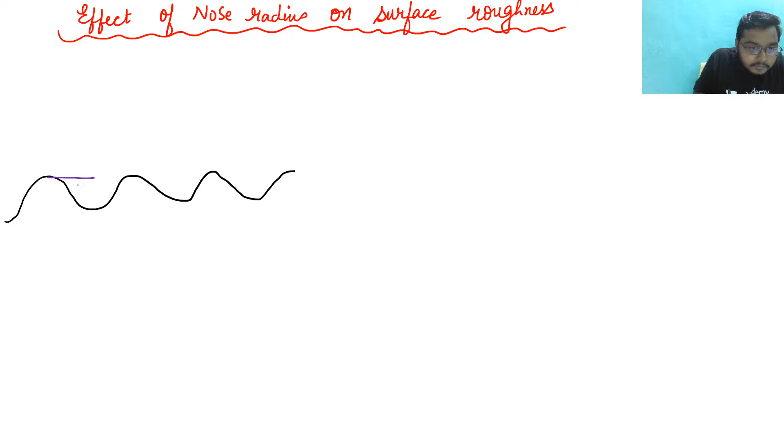So see, these are your peaks and valleys. When you machine a surface, you will get something like that. And this height, this height, is h max. So h max is given by f square by 8r.

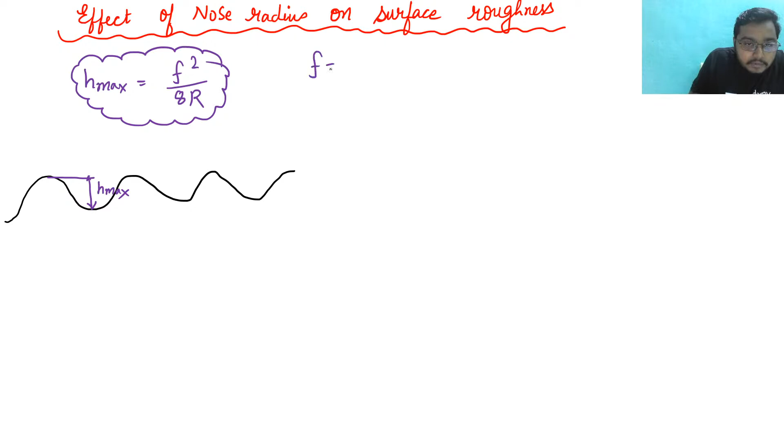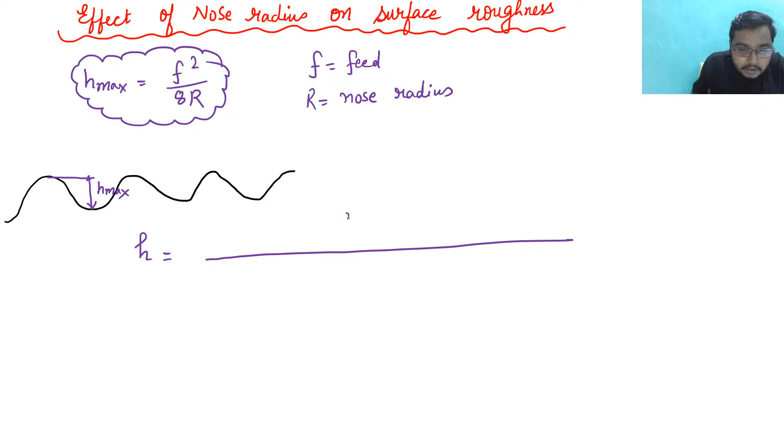Okay, where f is feed rate, r is nose radius. Next point is this h max, which is also defined as f divided by tan of cs plus cot of ce. This is another equation.

Clear? Now, cs is side cutting edge angle, and ce is end cutting edge angle.

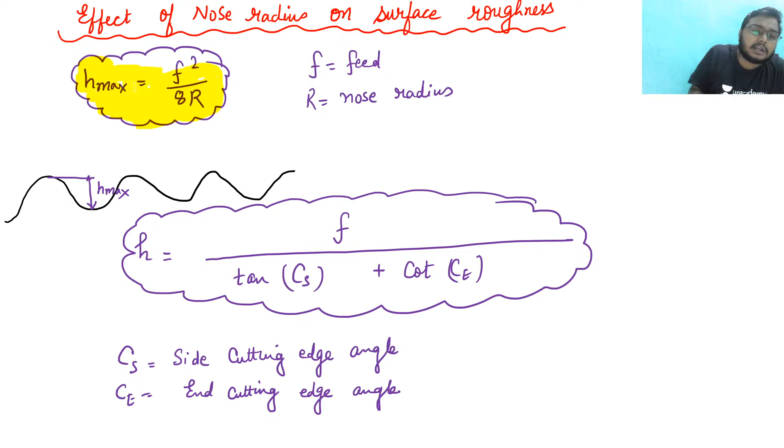So these are the two important equations from the nose radius point of view, and the relation between surface roughness and nose radius. Just remember these two equations. I have already explained the behavior when nose radius is increased, and how surface roughness looks like when it is sharp. Only this formula had been overlooked. Kindly note this formula, it is very important. Take a screenshot and note it down, and I will explain one question related to this.

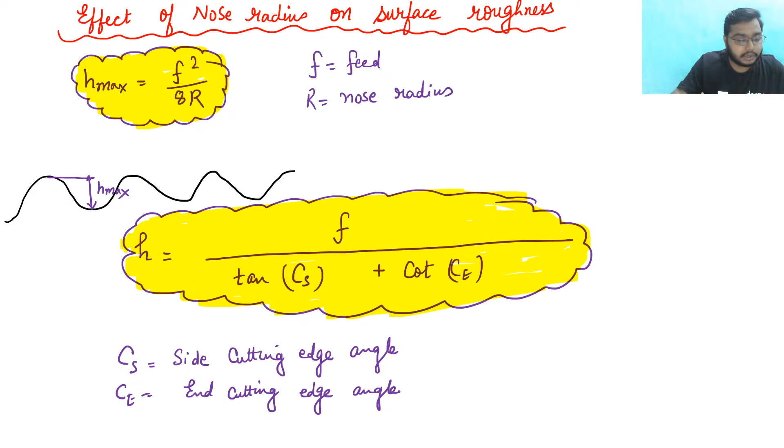So now see, there is one question. I hope you have noted down everything. This question is of GATE 2005.

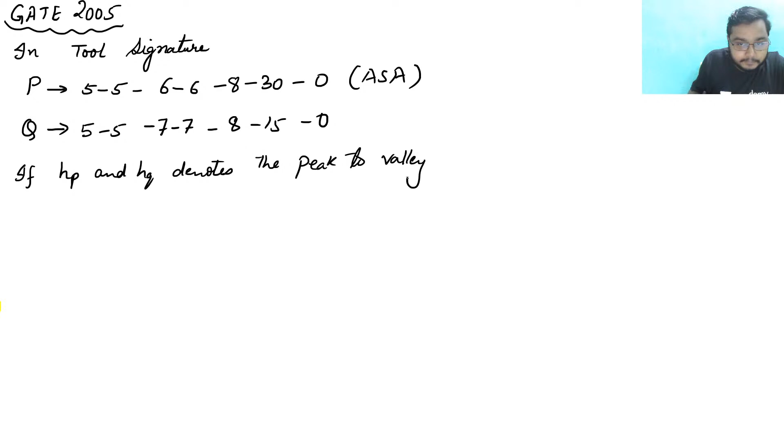The question is that in tool signature, for P it is 5 5 6 6 8 30 0, this is in ASA system. And for another, Q, it is 5 5 7 7 8 15 0, this is also in ASA system. If HP and HQ denote the peak to valley height, then we need the ratio of HP by HQ.

So you just need to find this. I have just told you the expression for this height. Try to solve it. Yes, good evening Nishant, please try to solve this.

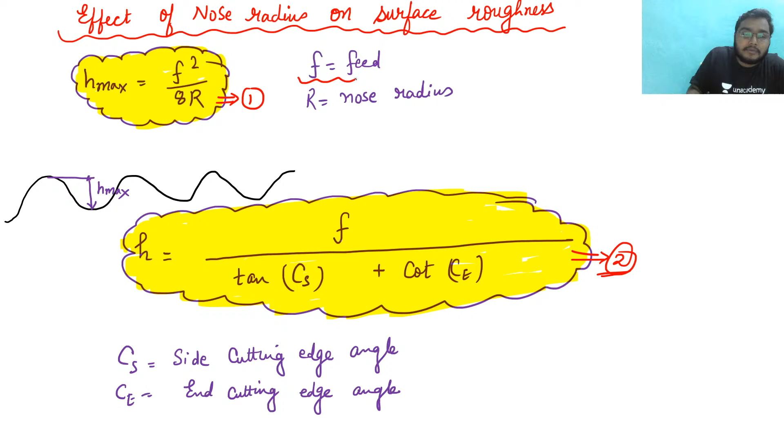We have introduced one new concept, the relation between nose radius and surface roughness. This is the one relation that you should remember, and this is another relation between feed, nose radius, side cutting edge angle, and end cutting edge angle. Please try to solve this question.

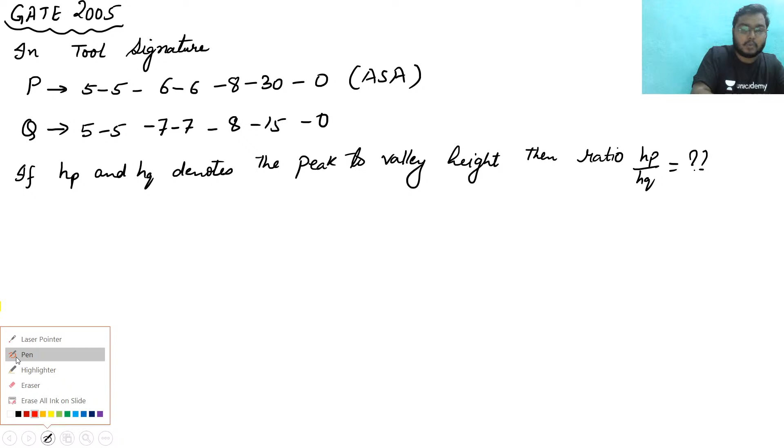Please tell me the answer. This is a basic question. If you could remember... okay, Asis has given 0.56. Let me check it, Asis. No, no, Asis, kindly check your answer once again, it is not 0.56. Please check your answer.

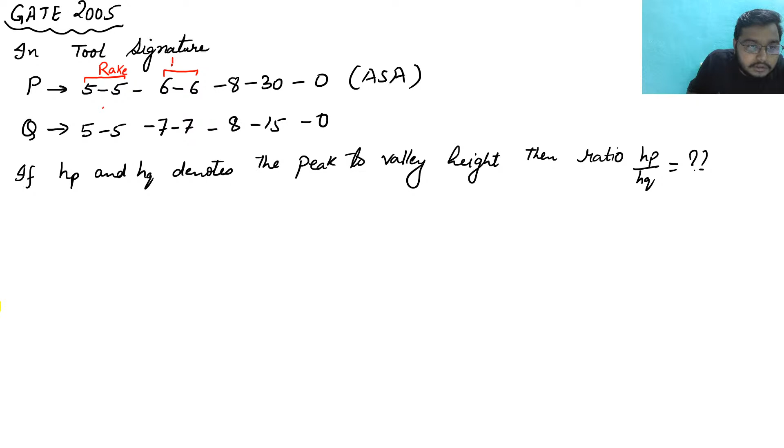See, what I told you when giving the nomenclature, how it looks like. This would be your rake, this would be your clearance, that is relief angle, rake. This is your relief, and this is your cutting edge. I have already explained this concept.

How are you people getting these weird answers? Yes Asis, now it's correct. See, cutting edge is what, this is the cutting edge, right? Now, I have already told you how to remember this: rake, this is alpha B, this is alpha S, this is gamma E, this is gamma S, this is end cutting edge angle, and this is side cutting edge angle.

Remember it as ESE, engineering services examinations, right? In this way I have already told you how to remember those things. If you have any problem, please check that video, feel free to check it. So this is the CE for tool P and CS for tool P.

So if I write HP, HP would be F by tan CE plus cot CS. Now what is CE for P? Sorry, that is tan CS unit. So this is going to be CS, this is going to be CE. Now what is CS for P? CS for P is 30. So tan of 30 plus cot of 8. This is for HP, let it be equation 1.

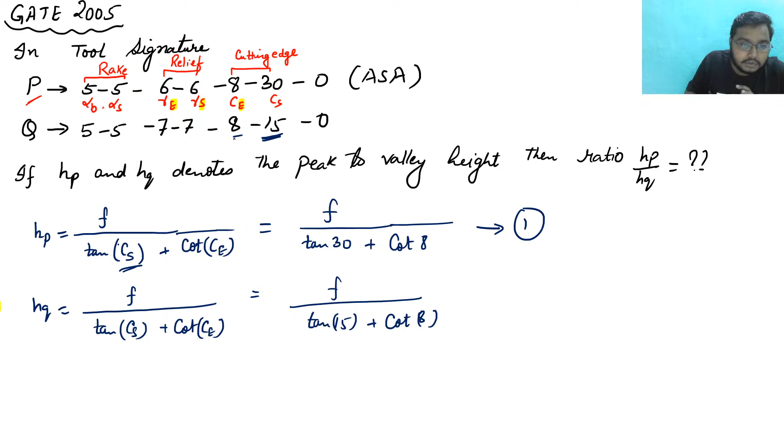For HQ, what should be the relation? F by tan of CS plus cot of CE. CS would be... so tan of 15 plus cot of 8, because this is going to be CE. Let this be equation 2. So HP by HQ is equal to F by tan of 30 plus cot of 8, into tan of 15 plus cot of 8, divided by F. The relation comes to be HP by HQ equals tan of 15 plus cot of 8, divided by tan of 30 plus cot of 8. Clear?

Clear? And if you would calculate this, then you would get the relation as...

0.9597. Okay, clear? So is this concept clear to you? Is this concept clear to you? Fine.

So there is only one thing. You have to remember the effect of nose radius on surface roughness, how it is denoted in terms of angles, that is in terms of side cutting edge angle, in terms of end cutting edge angle, and in terms of feed and nose. So I hope you have understood these things. Okay.

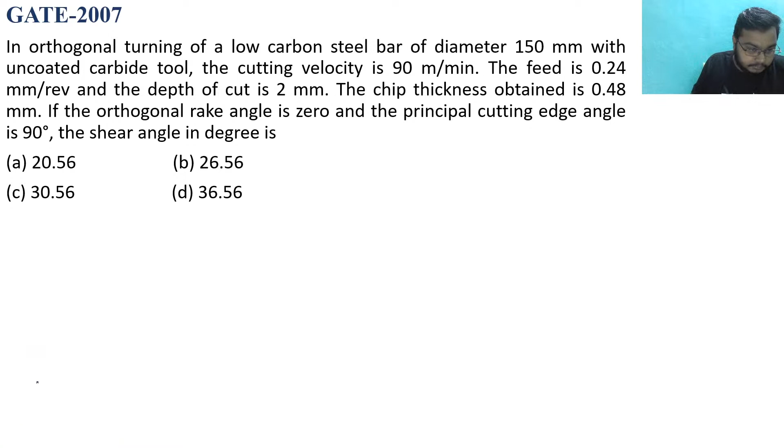in this question it is mentioned: orthogonal turning of low carbon steel. So whenever there is orthogonal machining, it simply means that lambda is going to be equal to 90. Clear?

Now, of a low carbon steel bar whose diameter is given as 150 mm with uncoated carbide tool, cutting velocity is given as 90 meter per minute. Feed is given as 0.24. Depth of cut is given as 2 mm. The chip thickness obtained is 0.48. The orthogonal rake angle is 0 - this is the most important thing. Orthogonal rake angle is 0 and principal cutting edge angle is 90 degrees, so this is 90 degree I have written.

So they have told us to find the shear angle. Okay, yes, B answer is there. So basic question is there: alpha is given as 0, lambda is equal to 90 degree, and since it is orthogonal machining, so I have told you

T is equal to F sine lambda. T is equal to F sine lambda. So if T is equal to F sine lambda, then T is going to be equal to F, which is 0.24. So this is your uncut chip thickness. Now chip thickness is what? Chip thickness is 0.48.

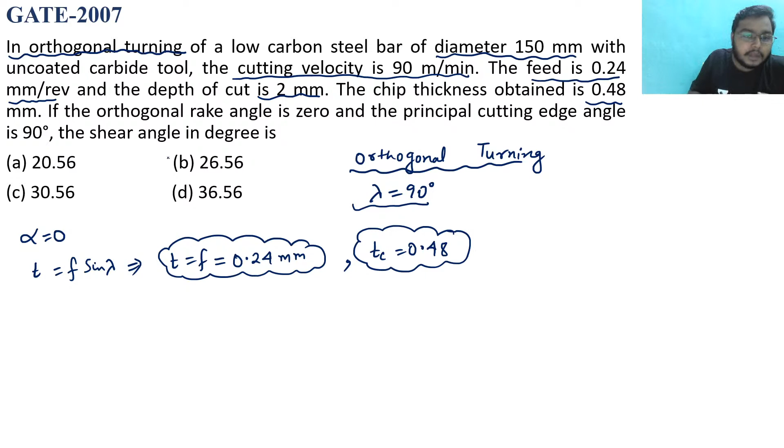Clear? So uncut chip thickness is given, chip thickness is given, orthogonal rake angle is 0. Then you have to find shear angle. So what you will do? Tan phi is equal to r cos alpha by 1 minus r sine alpha. Fine. How you can find the r?

R is going to be equal to T by Tc. What is T? T is 0.24 and Tc is 0.48. Okay, so this is R. Plug in the values. Now tell me the answer.

Okay, so answer is, this is going to be 0.5, and when you plug in these things, R cos of 0 by 1 minus R sine of 0, which will be left as only R, because cos 0 is 1 and R sine 0 is 0. So you will be left with phi is nothing but tan inverse of R, which is tan inverse of... So phi would be 26.56565. This is what we have got. Okay, and answer is going to be B.

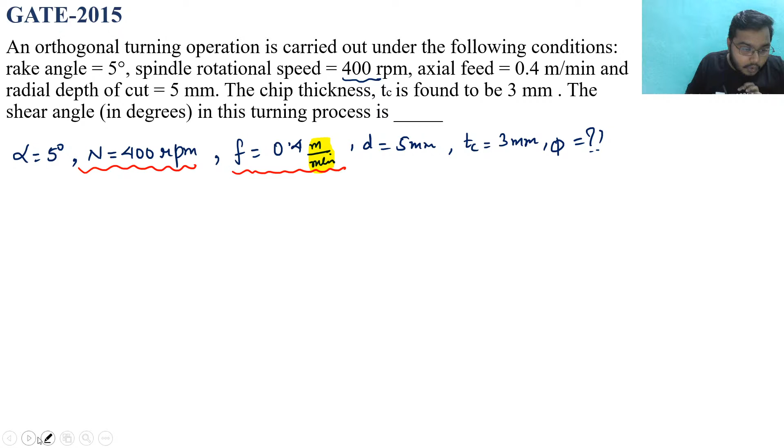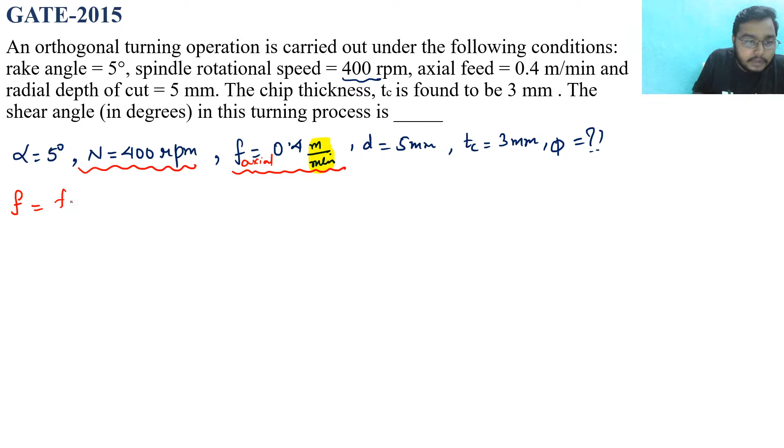So the first thing you have to do is to find the feed. How can you find it? This is the axial feed, F axial divided by N. When you do this, it is 0.4 meter per minute by 400 revolution per minute, and the minute gets cancelled, hence you are left with 0.4 by 400 into 1000. If you do this, you will get it in per revolution.

If you calculate these things, you will get only 1 mm. So from here, feed is 1 mm per revolution. Clear? Is this thing clear to you?

Even if the question was a routine question to find the shear angle, there is a twist here. So always read the questions very cautiously, because you might get a twist in your questions, just like a twist we see in a movie, right? So this feed is 1 mm per revolution.

Now since it is orthogonal turning, you can say T is equal to F is equal to 1. So this is the uncut chip thickness. Now what about the chip thickness? TC is 3 mm.

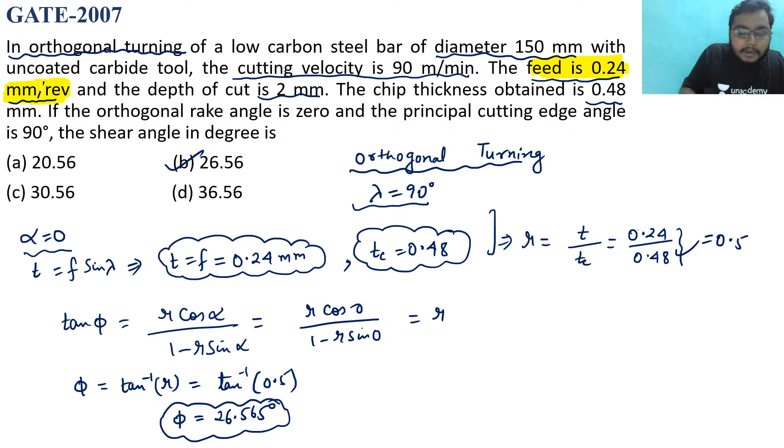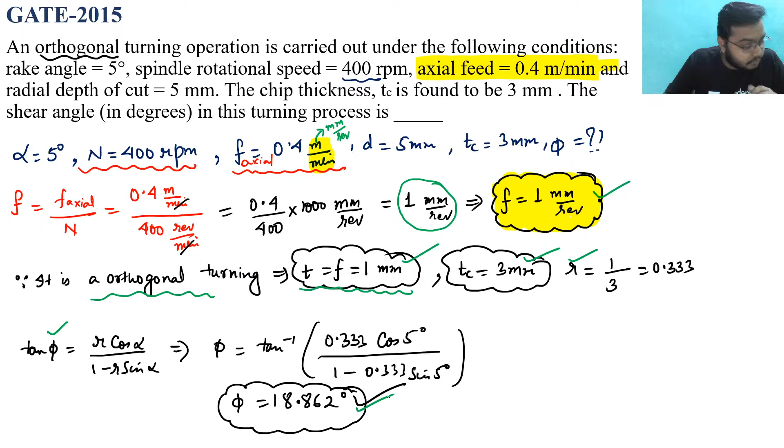Okay, thank you, no problem. Now try to solve this question, this is another question, GATE 2015. Try to solve this question. Same routine question is there, but just a little bit of twist is there, so your eyes and ears should be open, brain should also be open while solving the question.

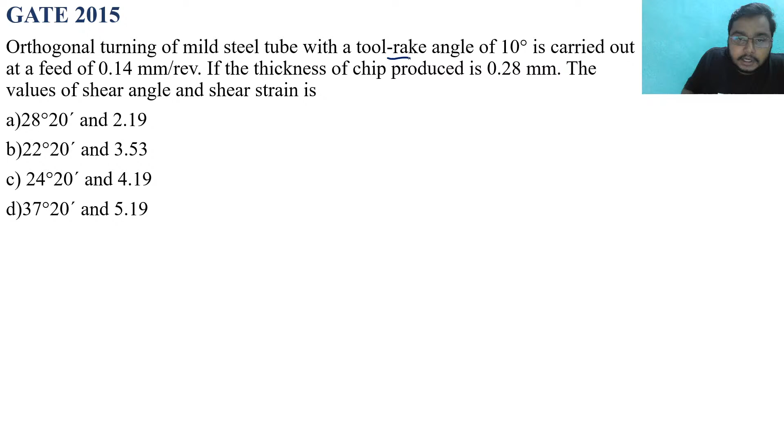Rake angle is given as 10 degrees. Feed is given as 0.14 mm per revolution, can you see it? 0.14 mm per revolution. So this is fine.

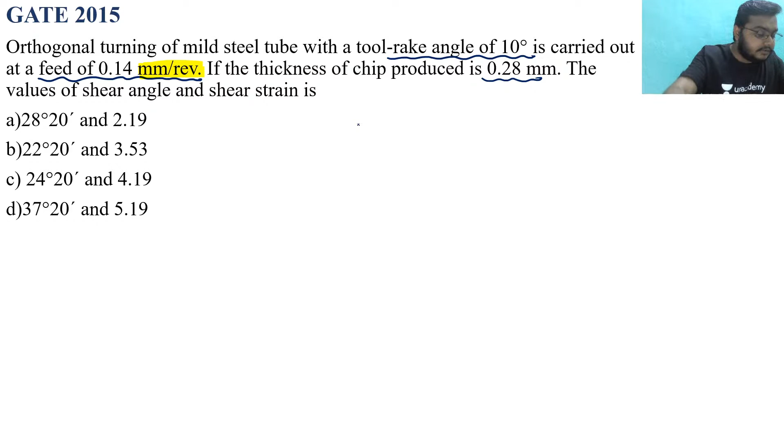If thickness of the chip produced is 0.28 mm, find the value of shear angle and the shear strain. Please try to find the value of shear angle and shear strain. Asis Shyam has given the option as A.

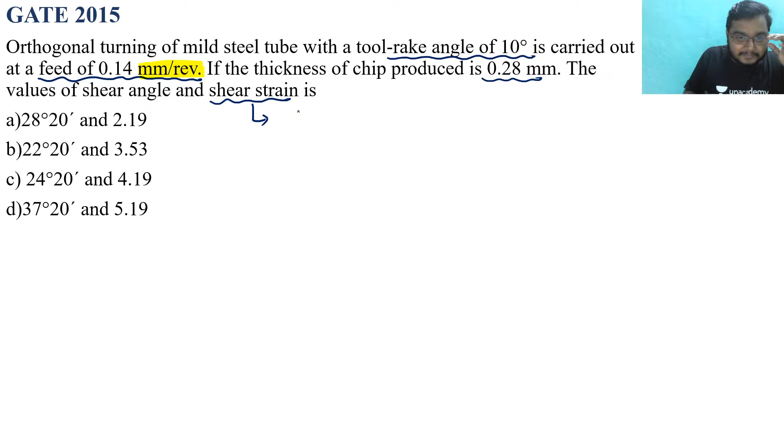Routine question is there, only one thing is there, shear strain. This is the shear strain, that is cot phi plus tan of phi minus alpha. So this is the value of shear strain, and how you can find it? You have to find phi, that is the shear angle, and shear angle will be tan of phi equal to r cos of alpha by 1 minus r sine of alpha.

Where r is this. This is the chip thickness, this is going to be your chip thickness, and feed is given as 0.14. So this will be your uncut chip thickness, right? So 0.14 by 0.28, this is going to be your r cos of alpha.

Alpha is 10. 1 minus of 0.14 by 0.28 sine 10, and when you solve this, you will get the value of phi. The value of phi that you get is 28 degrees.

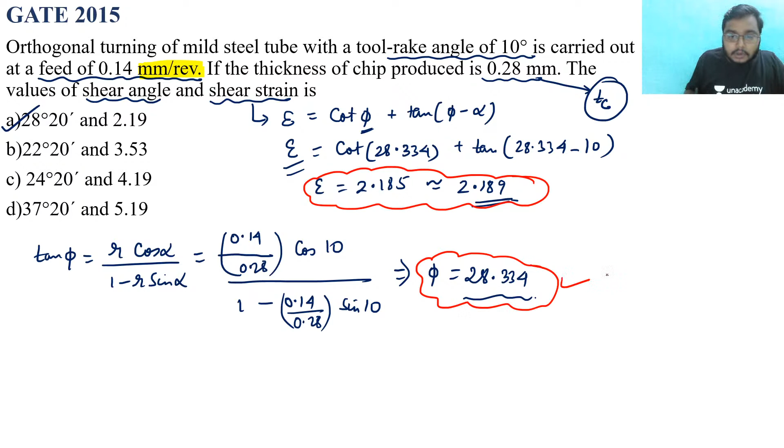I hope these things are clear to you. Now please try to solve this question, GATE 2016 problem is there. Please try to solve this question.

This session is going to be the end session of analysis of metal cutting, and from tomorrow onwards I will be teaching you tool wear, machinability, Taylor's tool life equations, and other miscellaneous things. After that your metal cutting is over.

But in this manufacturing you should practice a lot, and that is the reason why I am giving you so much of questions, because if you practice a lot of questions, then you can solve anything. Manufacturing really wants lots of practice from you. Please try to solve this question.

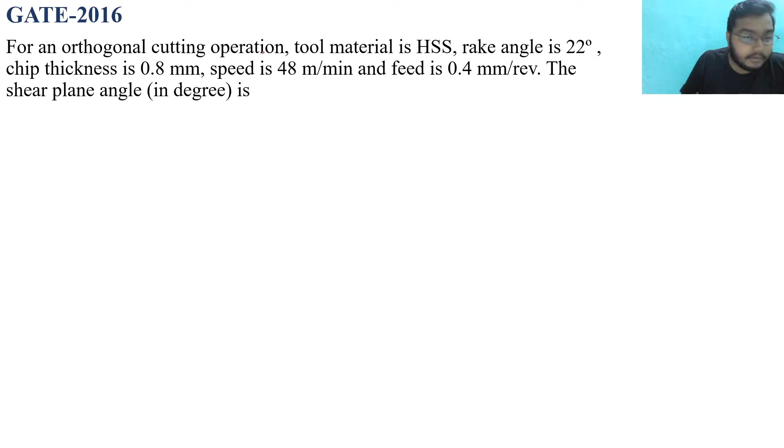Okay, so I have got a lot of answers: 29.7. This is an orthogonal cutting operation.

Tool material is high speed steel. Rake angle is 22 degrees.

Chip thickness is 0.8 mm, so chip thickness TC is equal to 0.8.

Speed is 48 meter per minute.

Feed is 0.4 mm per revolution, so F is going to be equal to 0.4 mm per revolution.

This is orthogonal machining shear angle. So F, this is the same thing, that is going to be T1, the uncut chip thickness. So T is equal to 0.4 mm.

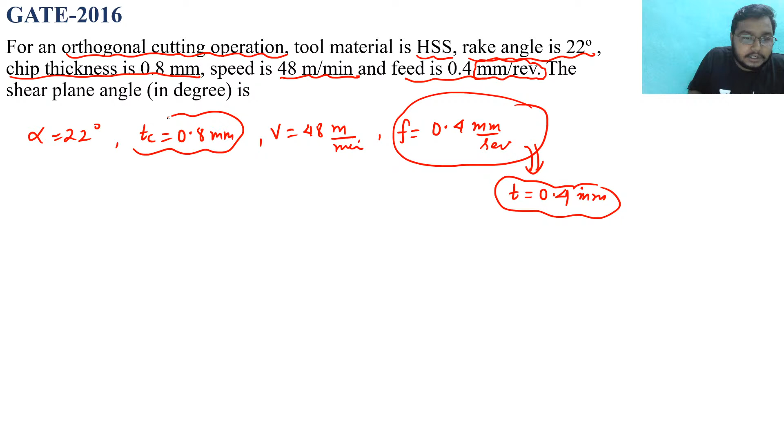You know the uncut chip thickness, you know the chip thickness, you can find R, and you know alpha. Just plug in these values in this equation: tan phi is equal to R cos alpha by 1 minus R sin alpha, and you will get the answer. The phi value that you will get is around 29.7 degrees.

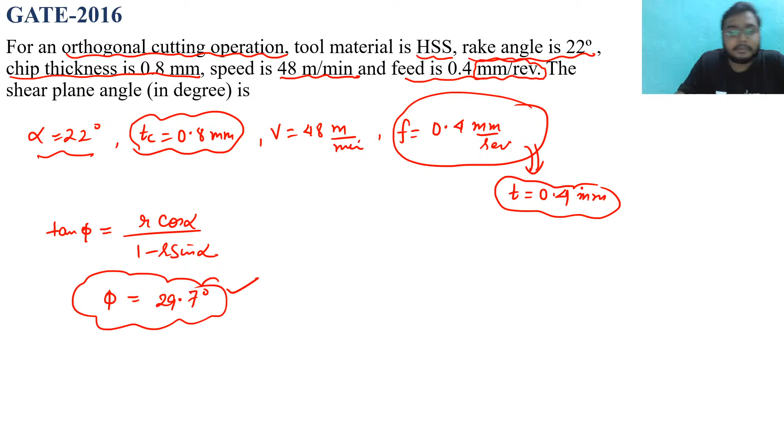Fine. These questions are very easy, so there is no need to repeat these things. These are just for your practice.

Now try to solve this question. Try to solve this question.

Please try to solve this question.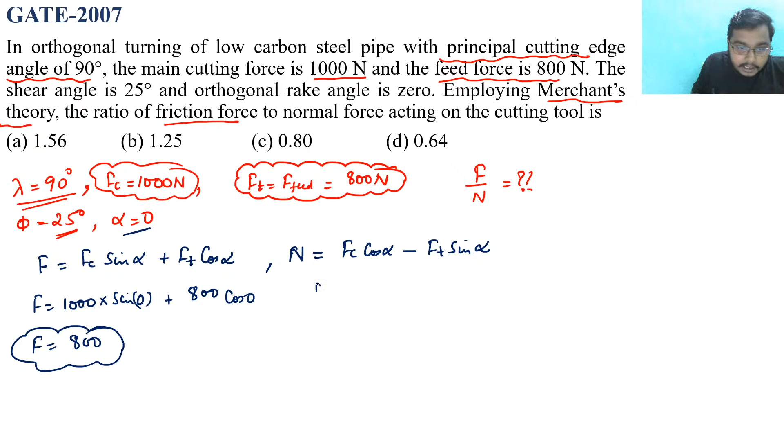And N is going to be equal to Fc, so N is going to be equal to 1000. So from here you got the value of F and the value of N. So F by N, that is mu, is equal to 800 by 1000. Clear? This is how you have got the value of 0.8.

I hope you have understood this problem. Yes, we can apply the special case here. See, whatever content I have given you, if you remember those things, you can solve the problem very easily. But there are multiple ways to solve a single question, so you should be aware of all the steps. Sometimes if you do not recognize the special case, you cannot solve the problem. So you just have to be very much accustomed with everything, so that you can solve this problem easily.

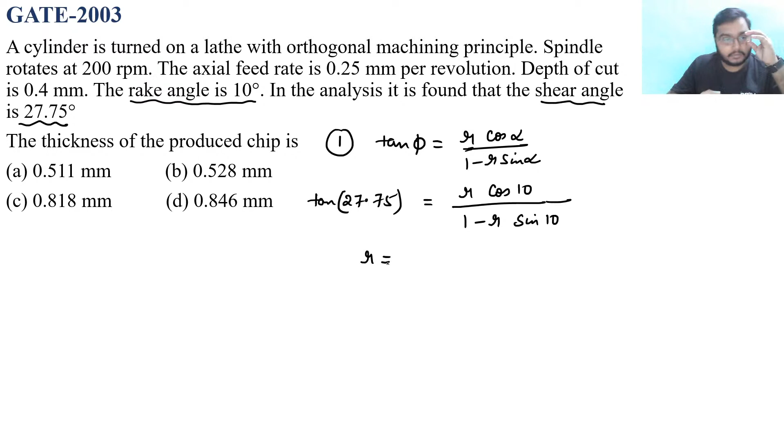Firstly you find the value of r. Tan phi, 27.75, is equal to r cos of alpha, that is 10, over 1 minus r sine of 10. From here find the value of r. Once you get the value of r, from that you can find the thickness of chip. I have given you a lot of hints, please try to solve this question.

What is the problem that you are facing? You are taking so much time, this is very unusual. You don't need to take this much time.

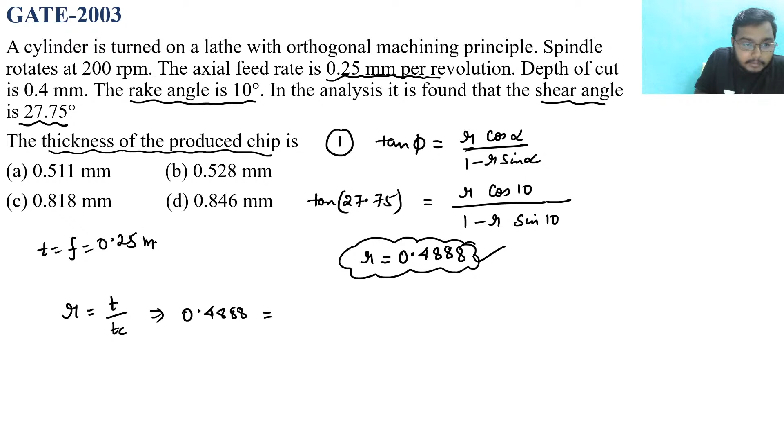Just see, from here you will get the value of r as 0.4888. This is the value of chip thickness ratio, and chip thickness ratio is nothing but t by tc. So 0.4888 equals T by Tc, and the value of axial feed rate is given as 0.25 mm per revolution. So from here T is equal to F is equal to 0.25 mm, because this is an orthogonal machining process. So this becomes 0.25 equals 0.4888 times Tc, and from here you get the value of Tc as 0.51138 mm. Clear?

Till now everything is clear to you or not? This is step 1: firstly you find tan phi, which is equal to r cos alpha by 1 minus r sin alpha. From here you find the value of r. Once you find the value of r, you use the equation r is equal to t by tc, and then you get the value of chip thickness.

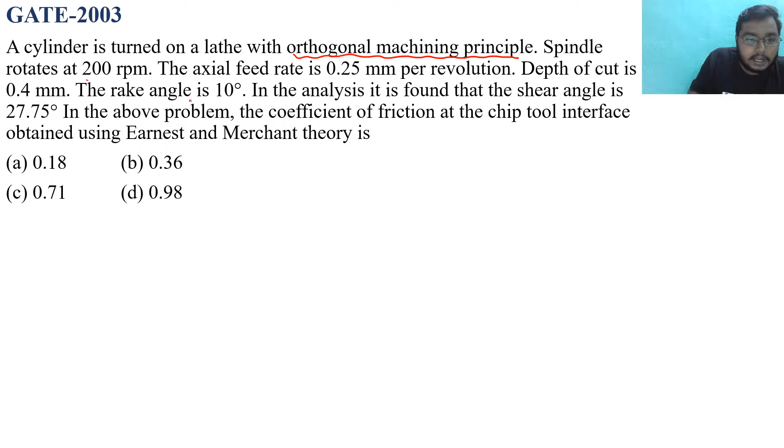In this question, a cylinder is turned on a lathe with orthogonal machining principle. Spindle rotates at 200 rpm. The axial feed rate is 0.25 mm per revolution. Depth of cut is 0.4 mm. Rake angle is 10 degree.

In analysis, it is found that the shear angle value is given as this. In the above problem, the coefficient of friction at the tool chip interface is obtained using Earnest and Merchant theory.

In this question, it has been explicitly mentioned to use this theory, the Merchant theory, to solve the problem. So what you need to do, you need to first find the rake angle. The rake angle is 10 degree.

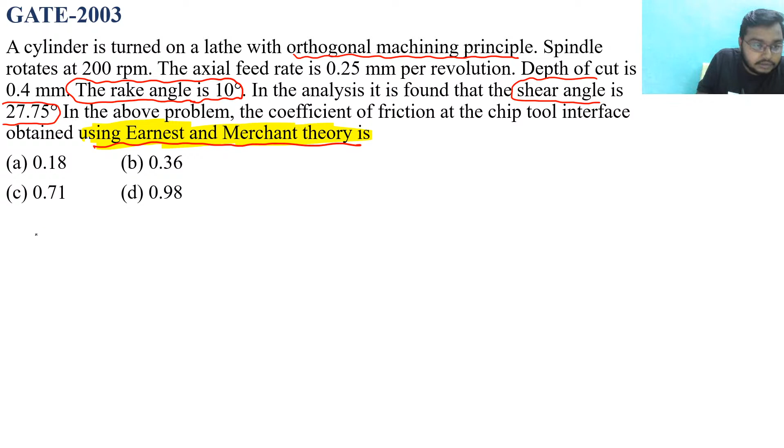Shear angle is 27.75 degree. Whenever in a question it has been explicitly mentioned to use the Earnest and Merchant theory, feel free to apply this equation: Phi is equal to pi by 4 plus alpha by 2 minus beta by 2. Feel free to use this equation.

Always use this equation whenever merchant theory is mentioned in the question, and if it is not mentioned, do not use this equation. So phi is 27.75, this is 45 degree plus alpha by 2, that is 10 by 2, minus beta by 2. You have to find beta, so from here the beta value is going to be around 44.5 degree.

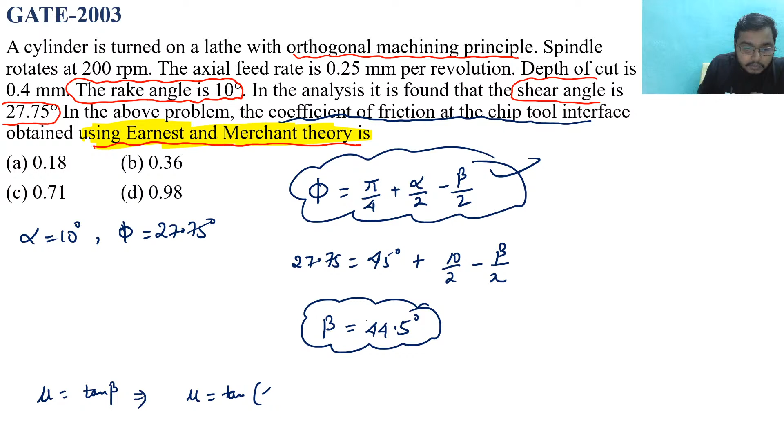In this question, coefficient of friction at tool chip interface, mu, is equal to tan beta. So mu is equal to tan of 44.5 degree, and this would be approximately 0.98.

Clear? So if this is clear to you, kindly solve this question.

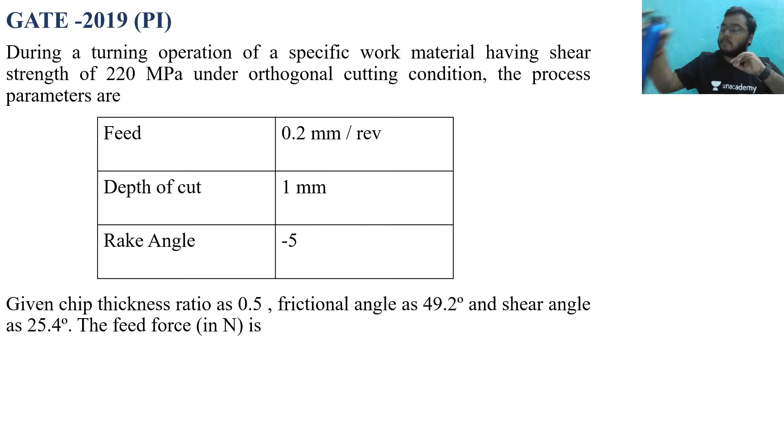Try to solve this question. I'm giving you 2 minutes time, and then I'll explain the question.

This GATE 2019 problem is there. Please try to solve this question. Minus 5 degree is there, the rake angle.

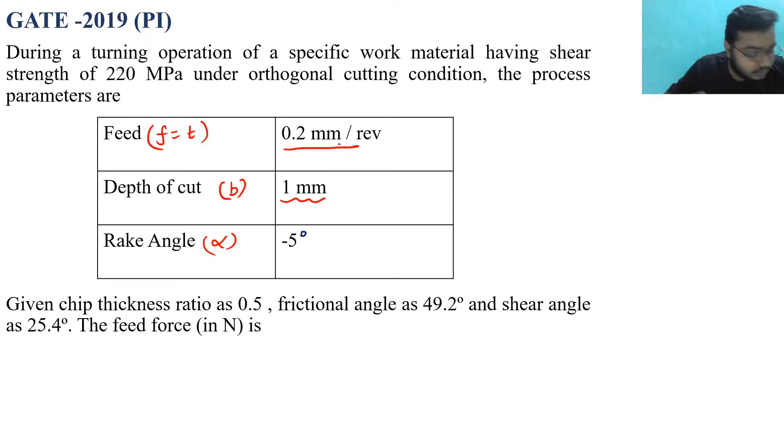Now please try to solve this question. First step, step 1. What should be your step 1? Step 1 should be to find Fs, the shear force. How can you find the shear force?

And step 2 should be this: find the feed force. That is the thrust force.

In this question, feed force is being asked, and I have already explained that thrust force is equal to feed force by sine lambda. In this question it is orthogonal cutting, so thrust force is going to be equal to feed force. So you just need to calculate the thrust force.

Asis has given 102. Please check your answer, Asis. If you have any doubt, then please ask me. Let me check the comment box.

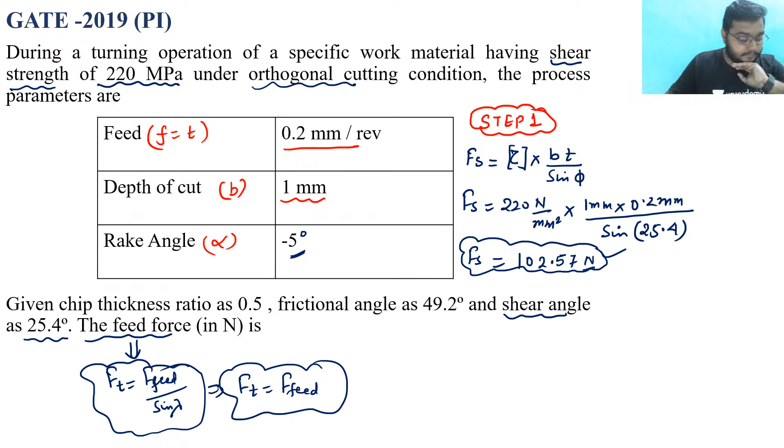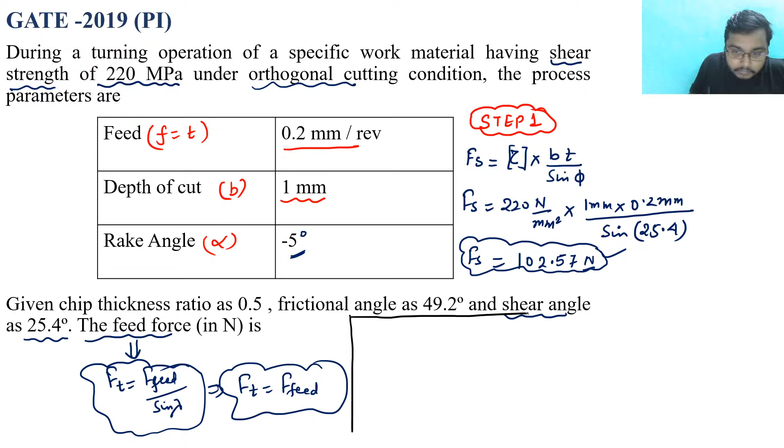Please try to find the feed force. See, step 2.

From the merchant circle, you can say that shear force is equal to r cos of (phi plus beta minus alpha). Okay, you know the value of phi, you know the angle of friction beta, you know the value of alpha. So you just plug in these values. Fs is 102.57, this is equal to r cos of phi, that is 25.4, plus beta is 49.2, minus alpha - since alpha is already negative, so it becomes positive. When you calculate, you will get the value of r, which comes around 568.25 Newton. So this is the value of r you have got.

Next step is that ft is equal to r sine of (beta minus alpha). So from this equation, ft is going to be equal to r, which is 568.25, sine of beta - what is beta? Beta is 49.2, minus alpha. Alpha is given as minus 5, so minus minus positive would be there, and from here ft is going to be around 460.88.

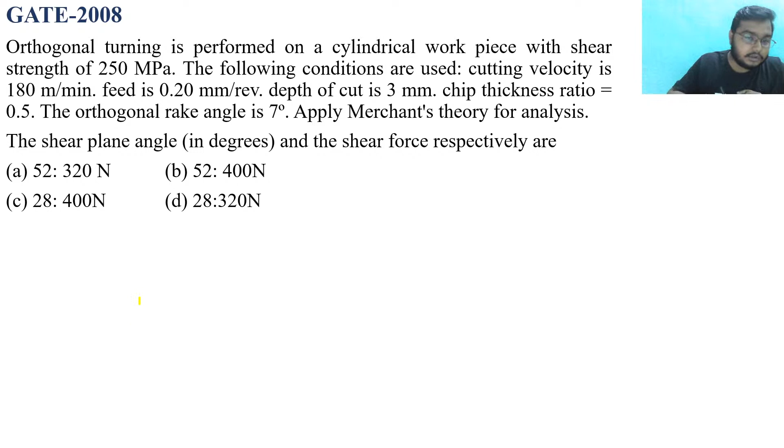Okay, so in this, shear plane angle and shear force is given. Just ignore this. Try to find the answer, and then I'll explain if you cannot solve the question.

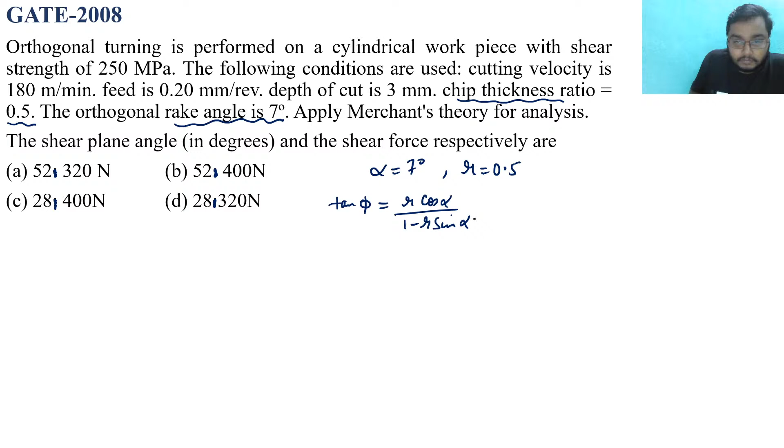See, rake angle is given as 7 degree. Alpha is given as 7 degree. Fine. Chip thickness ratio is given as 0.5. Now you apply this equation, tan phi is equal to r cos alpha, and when you apply this equation you will get the value of phi. So the value of phi is around 28 degree. So it simply means that if it is 28 degree, then this option cannot be the answer, and this cannot be the answer either - so only C and D can be the answer. Next is what? Shear force. How can you find the value of shear force?

Yes, Syam, Shivam, Indrajit, everybody. Option D is correct. Option D is correct.

How can you find the shear force? Shear force is nothing but shear stress into B into T, we have seen this equation a lot of times. Now, what is the tau value given? That is the shear strength, 250 megapascals. 250 megapascal. What is B? In this case...

Feed is given as 0.2 mm per revolution. Depth of cut is given as 3 mm, and cutting velocity is given as this. So depth of cut can be written as B is 3 mm, and feed can be written as uncut chip thickness.

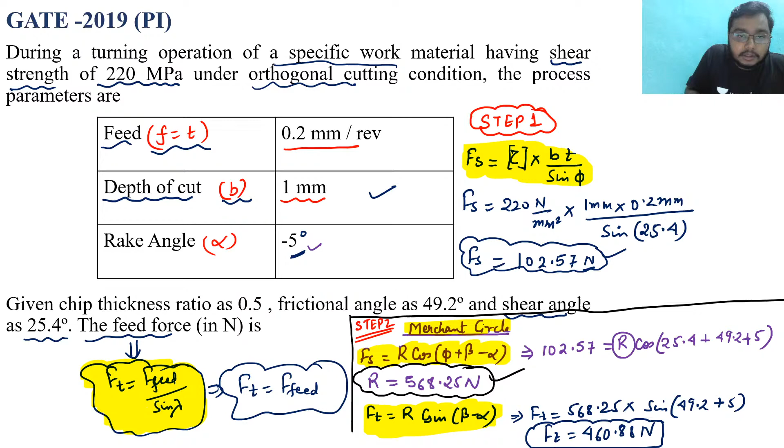These two things you have to see for orthogonal machining. Just like the earlier question, where depth of cut was given, we assumed B as 1 mm, and feed F is equal to T. Why? Because this is an orthogonal cutting operation. So similarly, plug in these values, B as 3 mm and T as 0.2 mm divided by sine of phi, sine of 28 degrees, and when you solve this you will get the value as 320 Newton.

So D will be correct. Clear?

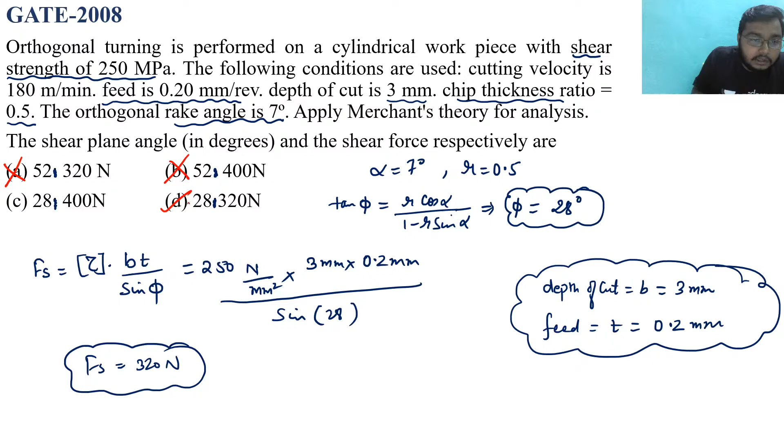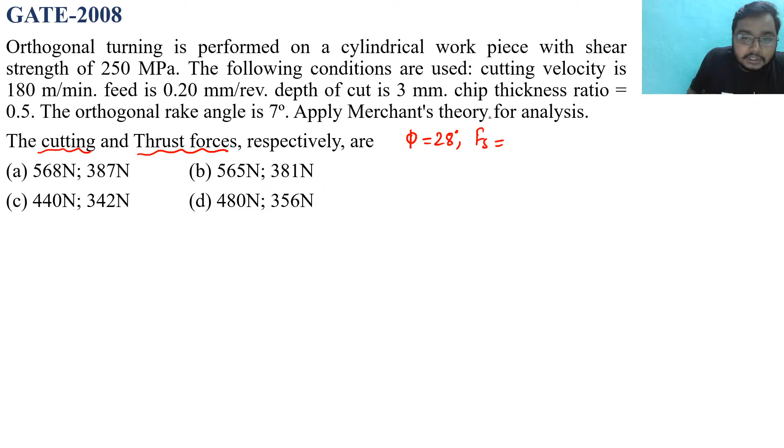So you can use the previous data, right? What are the previous data that you have got? Phi is equal to 28 degrees, and shear force is 320 Newton. So you can use these two data and try to solve the cutting and thrust force.

Asis has told 9 out of 10.

Yes, that's why I have also made a strategic video on what should be your strategy for your 4 months GATE preparation. In that I told you to make a galti wali copy. Why? Because in this copy, write the mistakes that you are committing while solving the problem. When you turn the pages of this copy, you will understand, oh, my mistake is the calculation, or my mistake is that I cannot remember the formula, or it was 1 by 2 and I mistakenly wrote 2. These mistakes will make you cautious about your area of mistakes, so you can try to improve and fix them.

A time will come, believe me, when you will solve this question without even touching the pen, I bet you. But for that you need a lot of practice and a lot of concentration. So for those who are making mistakes, please try these things, and definitely you will be able to solve the questions. Please try to solve this question.

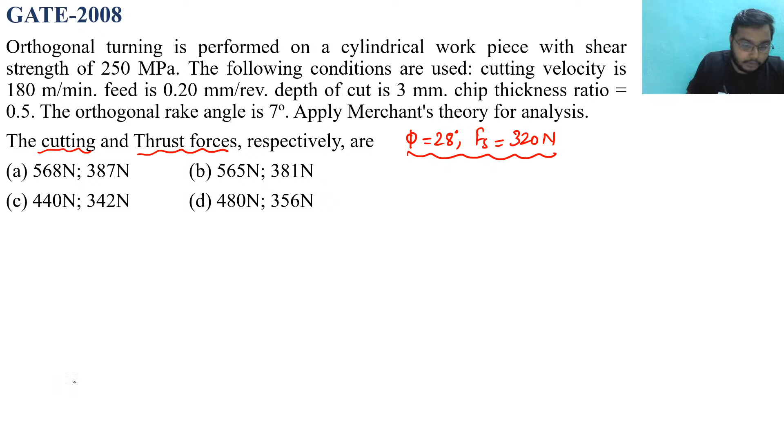For your reference, I am just making the merchant circle.

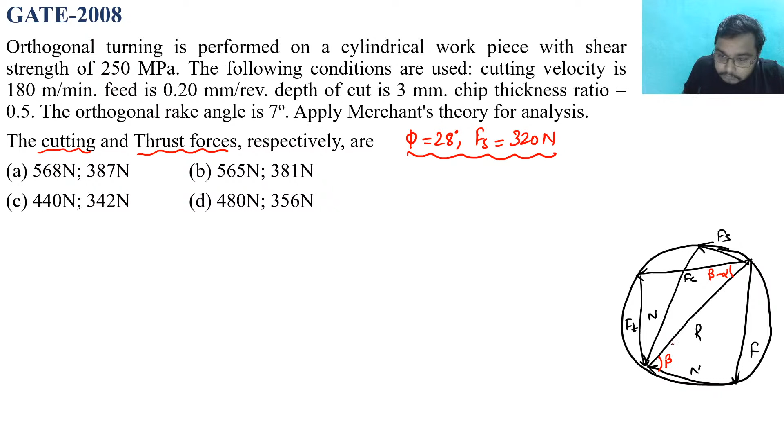Those who have passed out need to work a lot in their preparation. And those in second, third, and fourth year need to work even harder. They have to give the BTech examination as well as prepare for GATE. So in both cases, you have to work very hard to crack GATE. Believe me, cracking GATE is very easy, but the problem is you have to work a lot. Bahut mehnat karni hogi sir.

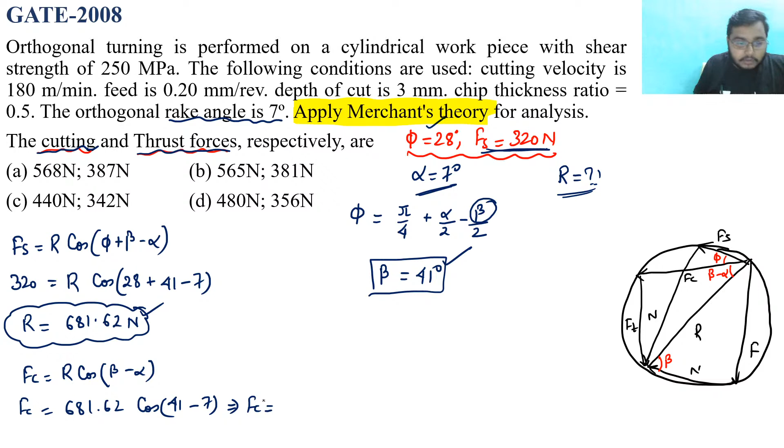681.62 cos of (beta is 41 minus alpha is 7). So your Fc value is going to be equal to, find the value of Fc from this equation. Similarly, Ft is going to be equal to R. See, this is cos, so that will become sine. Sine of (beta minus alpha). Same thing, you have to plug in the values: R is 681.62, sine of beta, what is beta? 41. What is the value of alpha? Now you can find the value of Ft.

How are you getting the value, Asis? Let me calculate it. Asis, just give me some time. And you people, please calculate it too. Okay, I'm checking the answers once again.

Fc value that I am getting is 565.088 Newton. And Ft value that I am getting is 381.157. So it is option B. Yes, it is option B. 565 and 381.

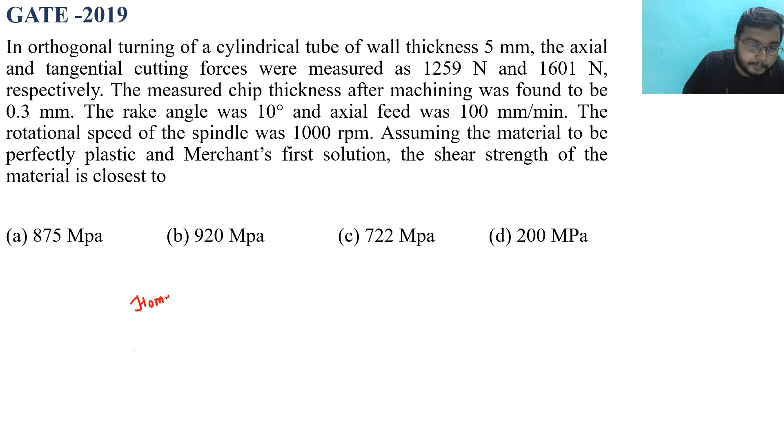This is practical. Yes Kiran, I will teach material science too, I teach material science. See, from a mechanical point of view, material science constitutes around 1 to 2 marks, right? So there are only some selected topics in material science that you need to study. The rest is very easy. Material science will require 2 to 3 more classes, that is enough.

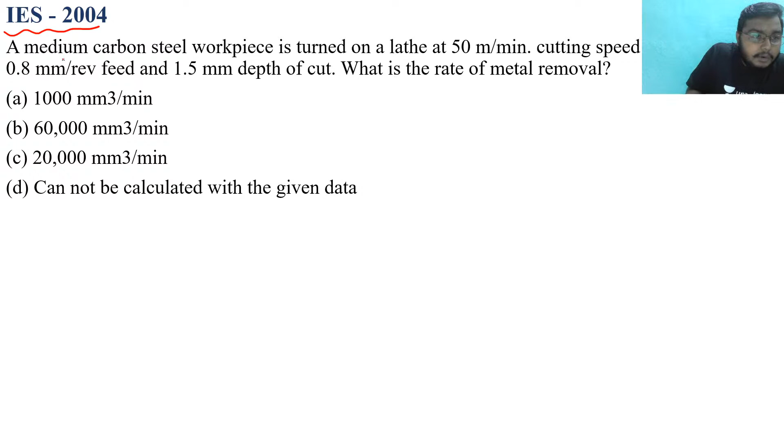A medium carbon steel workpiece is turned on a lathe at 50 meter per minute. So 50 meter per minute is the cutting speed velocity. Feed is given as 0.8 mm per revolution. Depth of cut is given as 1.5 mm. What is the rate of material removal? I have told you MRR is DFV.

MRR is DFV. What is D? D is depth of cut, that is 1.5 mm. What is feed? That is 0.8 mm per revolution. And what is V? V is 50 meter per minute. This is in meter, better to convert this in mm, that is 10 to the power of 3 mm per minute.

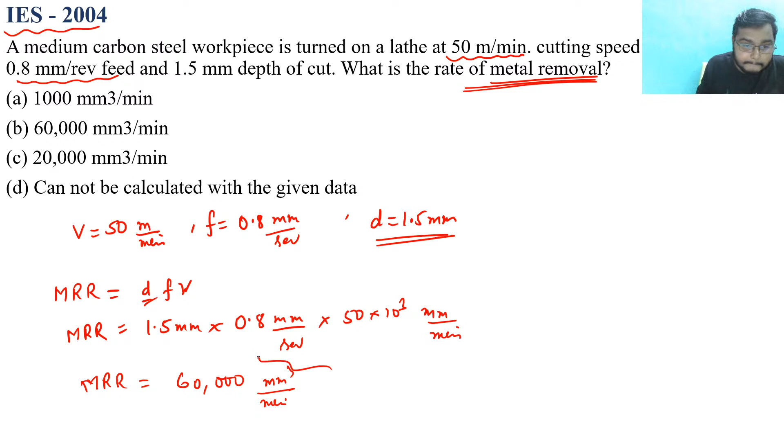So when you calculate this, you will get the value of MRR. Clear? For those who haven't solved it, this is the thing: the relation is MRR is equal to DFV. How is Girish getting 0.8?

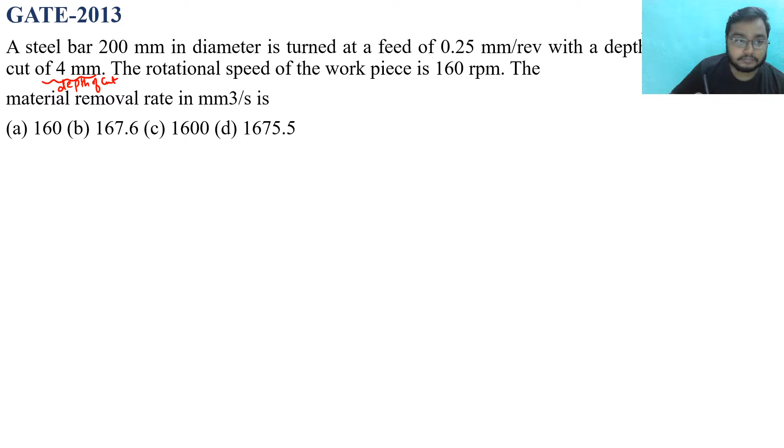Option D. Yes, option D is correct. I'm giving you 1 minute time and then I'll solve it. I'm getting option D from a lot of replies. Okay, see.

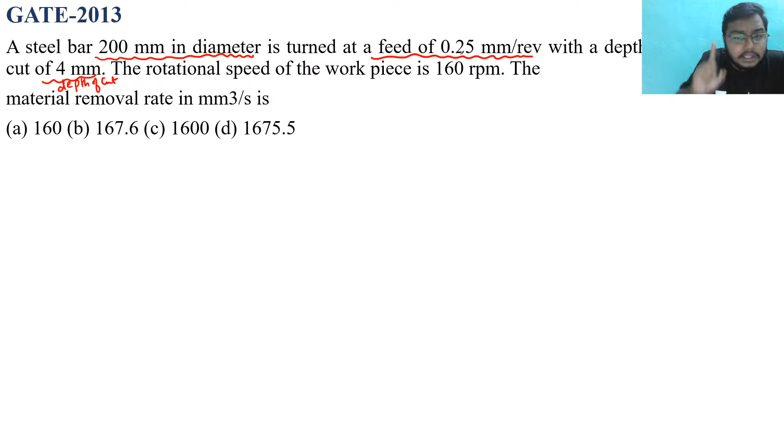In this question, a steel bar of 200 mm in diameter is given, which is turned at a feed of 0.25 mm per revolution with a depth of cut of 4 mm. Next, the rotational speed of the workpiece is 160 rpm.

The material removal rate in mm cube per second is what? Sir, material removal rate is area of cut into cutting velocity, this is nothing but equal to DFV. So MRR is going to be equal to D, that is depth of cut 4 mm, feed is 0.25 mm per revolution, into velocity. How can you find the velocity? Velocity is equal to pi*d*n/60, where d is 200 mm diameter.

So pi*d is 200 mm, n is 160 rpm, revolution per minute, divided by 60. From here, see, revolution gets cancelled. This is mm, this is mm, this is mm, so mm cube, and this is per minute. They're asking in seconds, so from here you convert to get answer in seconds. So MRR is going to be equal to, you just calculate, and that comes out to be 1675.5 mm cube per second.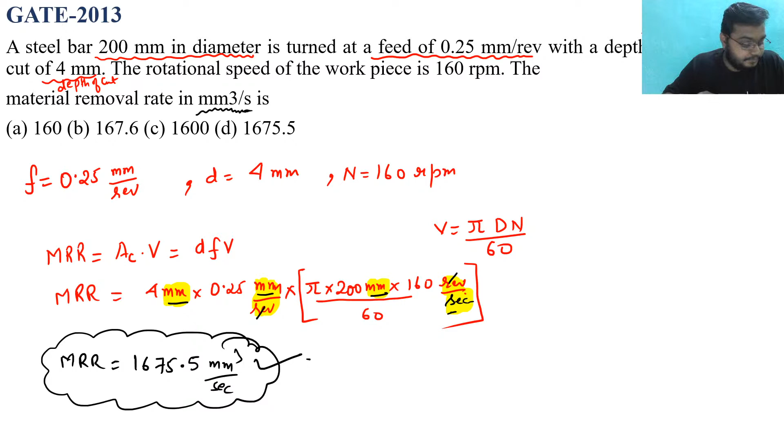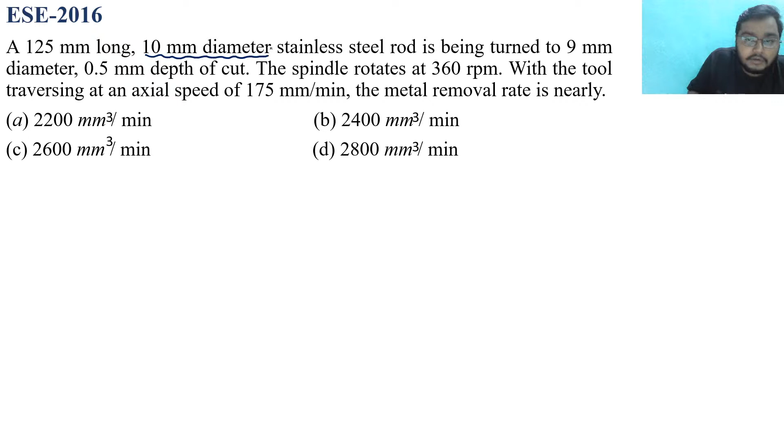Kindly solve this question. See, a 125 mm long, 10 mm diameter stainless steel rod is being turned to a 9 mm diameter. So earlier it was a 10 mm diameter steel rod, and it has been turned to 9 mm diameter. So the depth of cut is given as 0.5 mm.

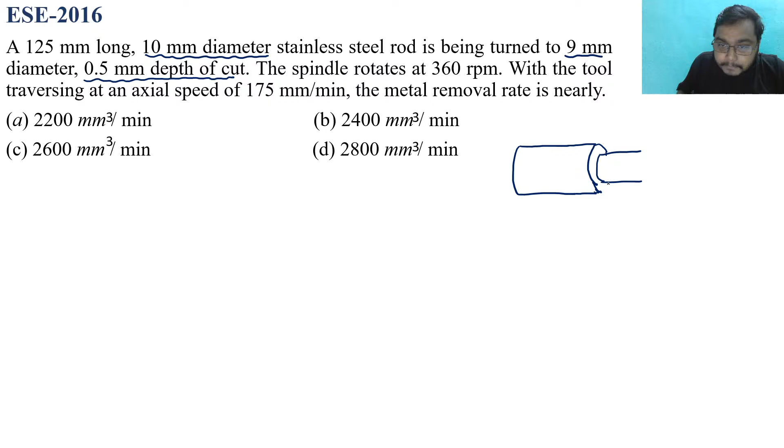So this is your 10 mm and this is your 9 mm, clear? So depth of cut is given as 0.5 mm. Spindle rotates at 360 rpm with the tool traversing at an axial speed of 175 mm per minute. Metal removal rate is nearly what? I got an answer, okay, option D. No, option D is wrong. Shivam, kindly check your answer.

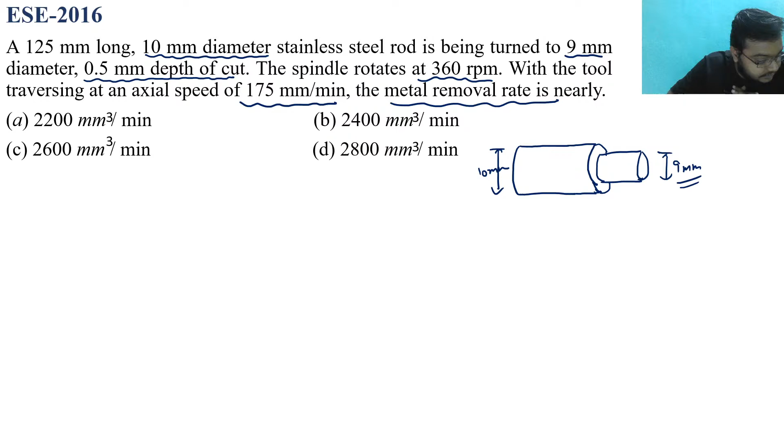Okay, see, I just leave this for your practice. In the upcoming class, I will explain the concept to find the material removal rate in case of turning operation, in case of drilling operation, in case of shaping operation, in case of milling operation. These things I'm going to tell you in the upcoming classes, so how you can find the MRR and what are the things. For now, time being, practice this question.

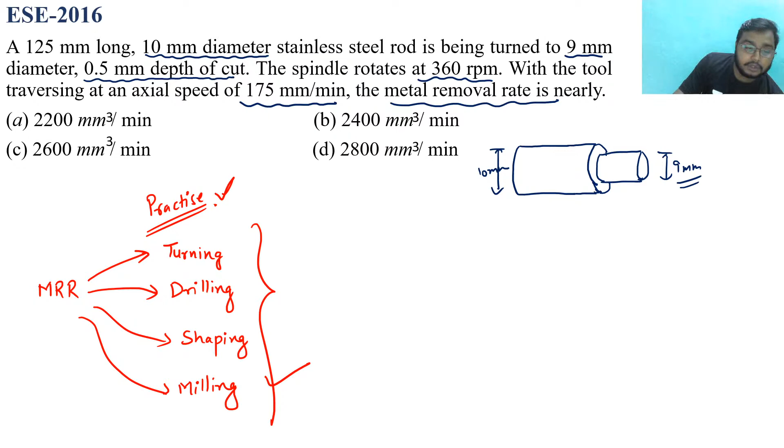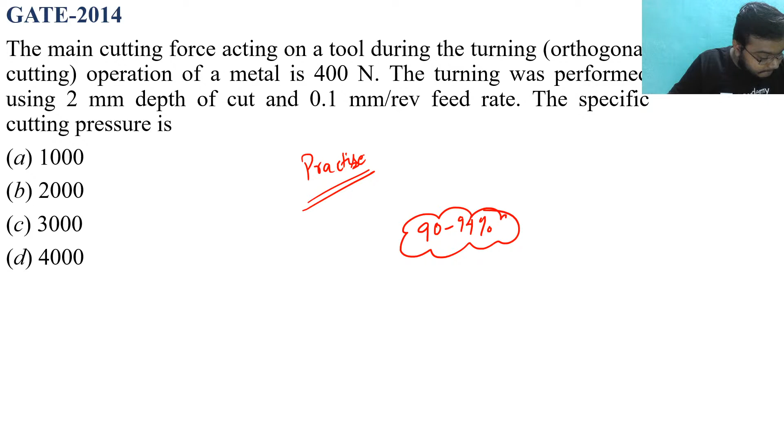That's okay, no problem. That's why I have given you these questions to practice at home, and in the next video please let me know if you have problems, then I will solve each and every problem. I am not running away from anything. So these are the things - if you have any doubt then please let me know.